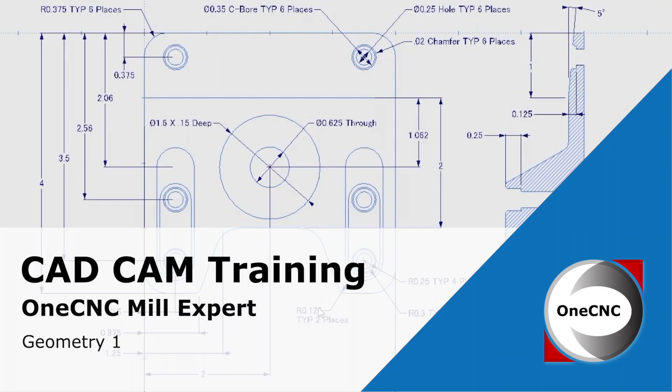Hello, this is Patrick at OneCNC West, and what we're going to do in this training video is create this part using OneCNC Mill Expert.

Now, to create this part, we're going to be using something called hybrid modeling. Hybrid modeling simply means that we're going to be using surfaces in conjunction with a solid model to create the final component.

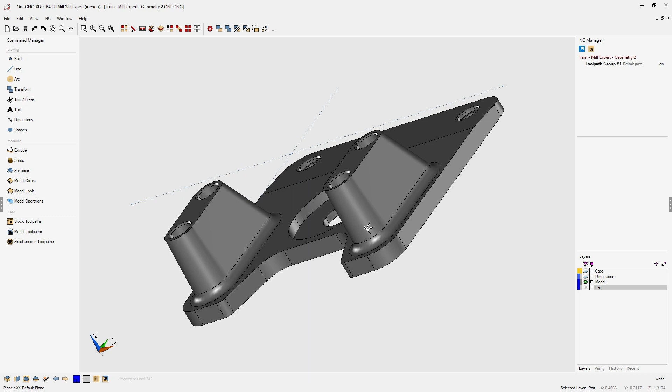Now, you'll notice that if we take a look inside the layer browser, I have a layer called Dimensions. Let's turn that on. The dimension layer is going to provide us with all the coordinates and dimensions for our geometry, and this is going to make for a great reference to make sure that our geometry is right on track.

Now, taking a look at the part, we can see that the part is symmetrical. So all we really need to do is just draw half of it, and then we can mirror that to save time. I think we should start by creating this outside boundary, so let's begin by doing that.

I'm going to turn our dimensions layer off and head over to the command manager and select our line tool. Now I want to use coordinate input for this. Our line's going to start at x0, y0, z0. So I'm going to click OK.

Now I want the endpoint of the line to come down to y minus 4. That looks good, so I'm going to hit the enter key. That takes me to the z coordinate. I don't need to do anything there. I'll hit enter one more time, and that recycles the prompt and creates the line.

Now it's waiting for the location for the next endpoint. This is going to be at x.875. Again, I'll hit the enter key, enter again, and then enter one more time to cycle through the axes. That looks great. So now it's looking for a new x coordinate.

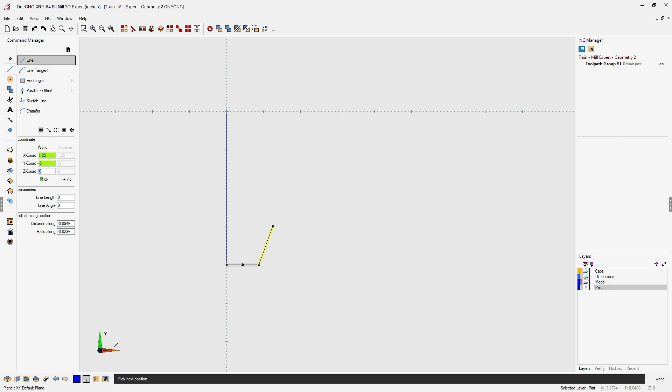This is going to be x1.25. I'll hit the enter key, and for the y value, this is going to be minus 3. So I'll hit enter, enter again, and now that we're finished, we can hit the escape key on the keyboard. Now let's quickly turn our dimension layer on and off and make sure that we're right on track. That looks excellent.

Now let's create the circles that represent the holes that we're going to be drilling. These holes have a diameter of 1/4 inch. We can see that up here. So our first hole is going to be at x.5 and the y value is going to be y minus 0.375. So let's create that.

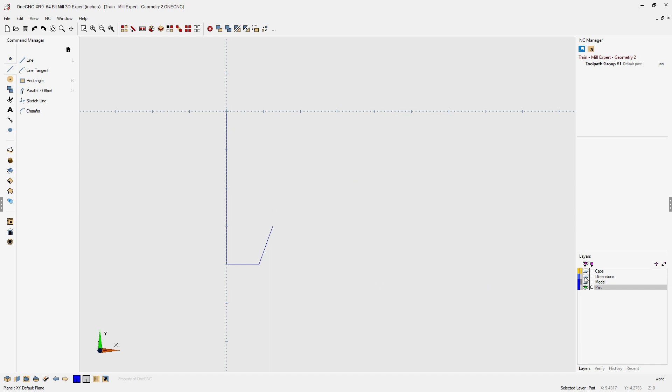Again, I'll turn our dimension layer off. Let's head over here to the command manager, and now we're going to use our circle tools. This is going to have a diameter of 250 thousandths, so 0.25, and the coordinate for this is going to be x.5. Going to hit the enter key, minus 0.375. Again, I'll hit enter, and there's our very first hole created.

Now for the second hole, it's going to use the exact same x coordinate. So I'll just hit the enter key, and the y value for this is going to be y minus 2.56. That looks good. Hit enter, enter.

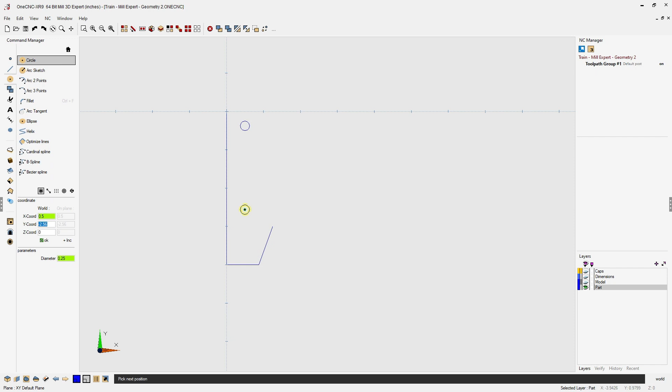The next and third hole is going to be again at x.5. I'll hit the enter key, and now the y value is going to be y minus 3.5. Very good. Hit the enter key, enter one more time to cycle through, and then I can hit the escape key on the keyboard.

Now these holes require a counterbore, and the counterbore has a diameter of 350 thousandths. These are going to be easy to create. We'll go back into circle. We'll change the diameter to 0.35.

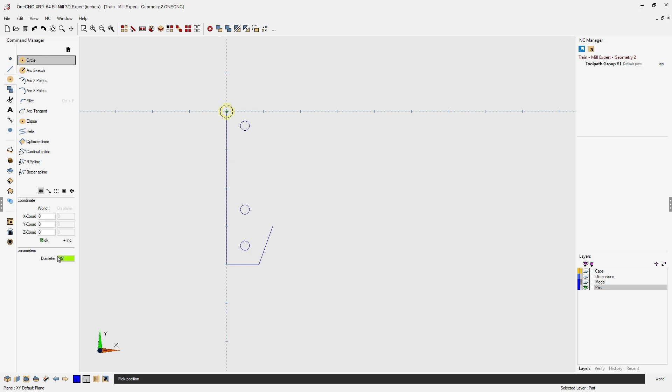And now instead of using coordinate input, I'm just going to take my cursor and snap the arc center of the arcs or circles that we've already created. Now you'll know you're at the arc center when you see the little diamond. Just left click, and left click. And when you're done, you can right hand mouse click. All right, let's turn our dimension layer on and off and make sure that we're right on track.

Very good. Now, what we're going to do next is we're going to create this oval. This oval shape is the base of this boss. Now, to create the boss, we're going to create these two circles first.

If we look at the dimensions, we can see that the circles have a radius of 300 thousandths. So let's create this circle first. To do that, we know that the x value is going to be 0.5, and the y value is going to be y minus 2 inches, 60 thousandths.

So let's create that. Let's turn our dimension layer off. Let's head over here to our circle command, and for the diameter, that's going to be 600 thousandths. All right, now the x value is going to be 0.5. Hit the enter key. The y value is going to be minus 2 inches, 60 thousandths. So we're going to hit enter, enter one more time to cycle through, and then we can hit the escape key on the keyboard.

If we reference our dimensions layer, we can see that we're right on track. Let's create the remaining circle down here. It's going to have the same x value, but its location is y minus 3.5.

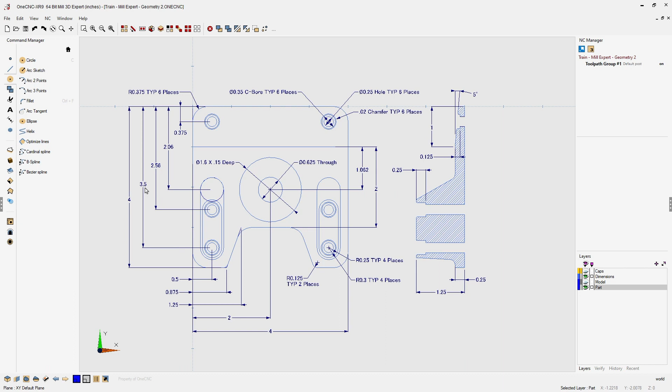In fact, we can actually snap this arc center to create this circle. Let's head back over into the command manager, select circle, diameter is already set at 600 thousandths. We can take our cursor and snap the center by left clicking, and when we're done, we right hand mouse click. I'm going to zoom in just a little bit.

Now let's take a look at creating this oval, this smaller oval. That represents the very top of the boss. Those circles have a radius of 250 thousandths. These circles are going to be easy to create. Let's do that. Let's turn our dimension layer off. Let's head over to the command manager. We're going to select circle, and this time the diameter is going to be 1/2 of an inch, 0.5.

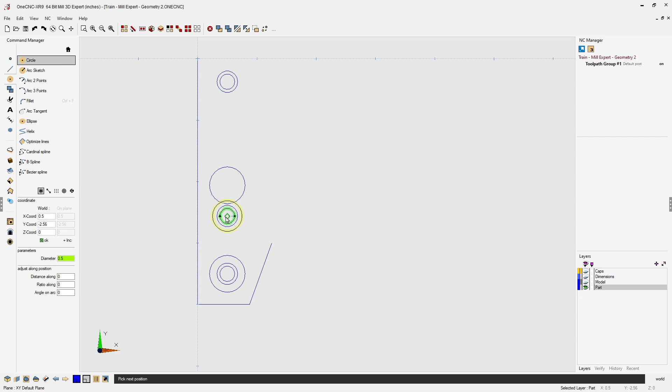All we have to do is take our cursor, and just like before, left click the very center of the existing arcs, just like that. All right, that's looking great. Let's zoom in a little bit.

Now let's create the lines to complete the ovals we're creating. We'll head back into the command manager, select the line tool, and for this we're going to use line tangent. I'm going to take my cursor, left click the big circle here, take my cursor down, and right when I get to that quadrant on that circle, I'll left click. Now I can come back over here, left click, and left click.

Let's do the same with the smaller oval. Same thing, we're going to left click and left click, left click and left click. And when we're done, we can right hand mouse click.

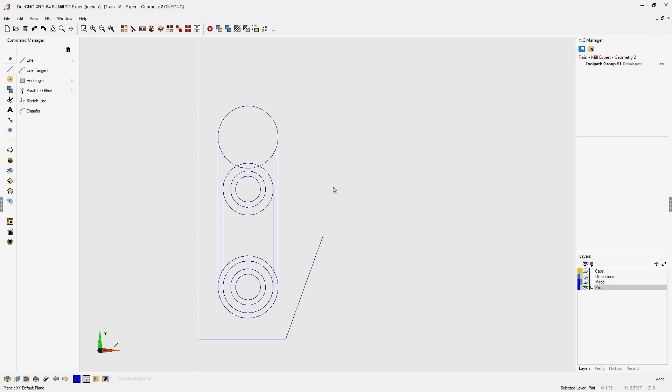Now probably the fastest way to trim this up is to use the scissor command. I'm going to hit the letter X on the keyboard, and all we have to do is just left click the geometry that we don't need. Again, all I'm doing is left clicking and left clicking, just like that. We'll continue the process to finish our ovals, and there we go.

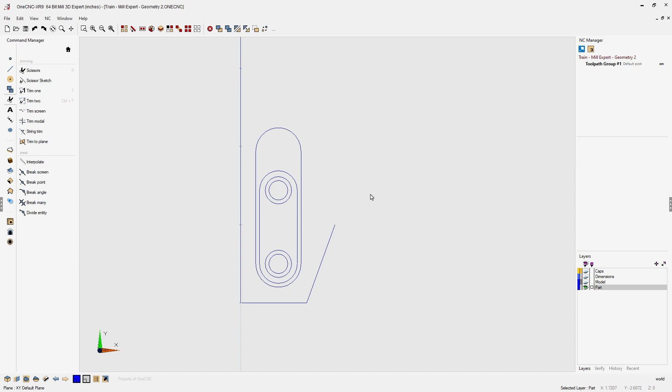We've got our main oval, the larger oval, to represent the base of the boss, and then we have the smaller oval to represent the top of the boss. Let's double check and make sure we're right on track. Let's head back over to the layer browser. We're going to turn our dimension layer on and back off again. We can see we're right on track.

All right, now it's time to mirror the geometry. When you mirror, rotate, or move geometry, you need to select it first. You can use any of your selection tools at the top of the screen, or a shortcut is hit Control-A on your keyboard. That will select everything.

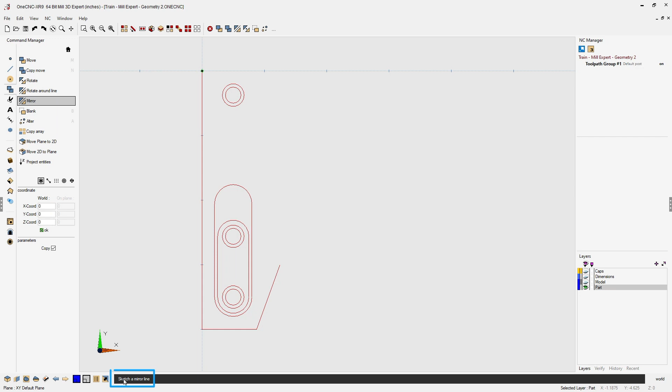I'm going to use the mirror command, and the first thing the mirror command wants us to do, we can check down here in the lower left corner, it says sketch a mirror line. Well, we know the part is 4 inches wide, so I can come up here to the grid and snap right at X 2 inches, pull my cursor down, and left click, and when we're done, we right hand mouse click. Very good. Now let's connect the outer profile.

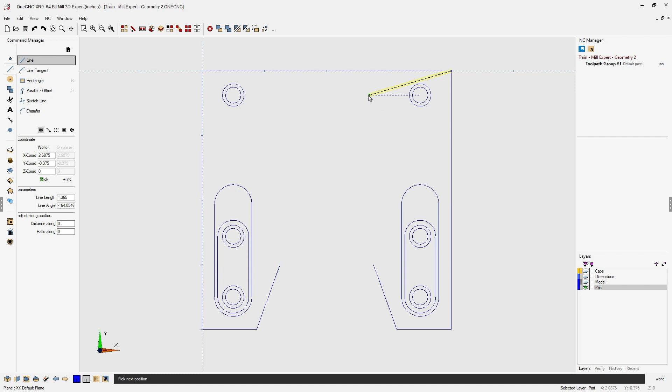Let's go back into the command manager, select our line tool. We're going to left click. When we're done with that line, we can right click, left click, and when we're done, we right hand mouse click. Let's take a look at creating these fillets.

If we turn our dimensions layer back on, we can see these fillets have a radius of 375 thousandths. So let's turn our dimension layer off, head back into the command manager. We're going to go into our circle tools, and there we'll find our fillet command. The fillet radius is 375 thousandths, so I'm going to type in 0.375, and all we have to do now is take our cursor and left click the 2 lines where we want to create the fillet.

It doesn't matter which direction we go. I'm going to left click and then hover over the next line, and notice how we get that preview. If I like that, I can left click again. So here's the process: left click, left click, repeated for each corner, and one more time, left click and left click. When we're done, we right hand mouse click.

Hey, I think our geometry is looking great. Let's quickly refresh our dimension layer and see if we're right on track. All right, this is looking good.

Now, if we take a look at the bottom of the part, we can see that there are 2 fillets, and these fillets have a radius of 125 thousandths. If I toggle the dimension layer on and off, you can see there's a fillet here and another one right here. Let's create both of those.

So I'm going to turn our dimension layer off. I'm going to head back over to the command manager, back into our fillet tool, and this time we're going to change the fillet radius to 125 thousandths. That looks good. So we're going to left click, left click, left click, and left click. And when we're done, we right hand mouse click.

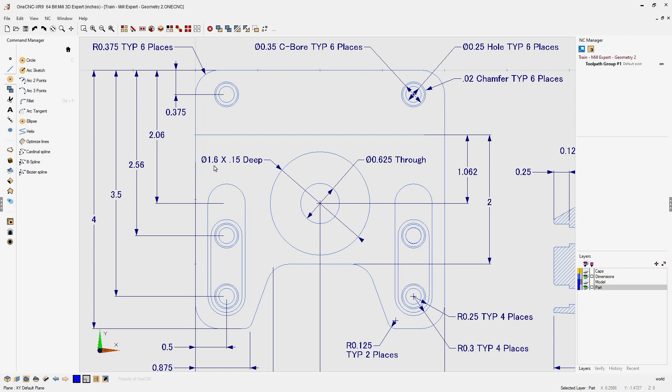This first circle has a diameter of 1 inch 600 thousandths. It's going to be created at x 2 inches, and the y value is going to be 1 inch 62 thousandths plus another inch, so that's y minus 2 inches 62 thousandths. Let's create that, and turn our dimension layer off.

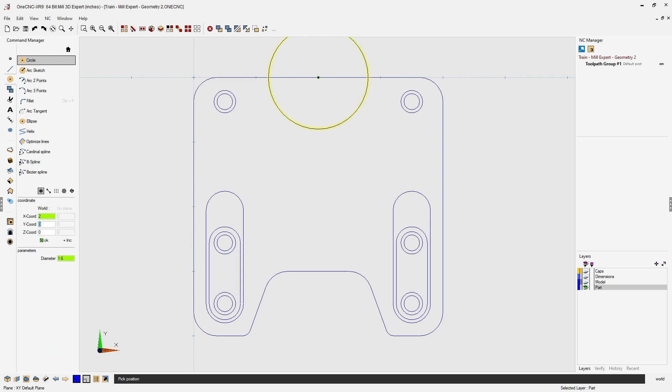Let's head over to the command manager and select our circle tool. The diameter is going to be 1 inch 600 thousandths. The x value is going to be 2 inches, I'll hit enter. The y value is going to be minus 2 inches 62 thousandths. I'll hit enter, enter one more time, and then hit escape to finish the command.

Now there's another circle inside here as well. Let's turn our dimension layer on and see what that is. That has a diameter of 625 thousandths. That's going to be super easy to create.

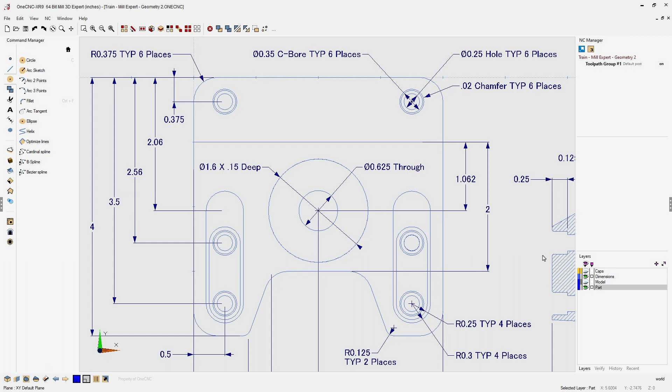We'll head back over to the command manager and select circle. The diameter is going to be 625 thousandths. Instead of using coordinate input, we can take our cursor and just snap the center of the larger arc. When we're done, we can right-hand mouse click.

Now there's one more line I'd like to create, and I'll tell you why. Let's turn our dimension layer back on. Notice how this part has a taper, a 5-degree taper. I want to create this line right here to represent where that taper begins. That's going to help us later on when we start creating our solid model. This line is parallel to this line, and the parallel distance is simply 1 inch, as we can see right here.

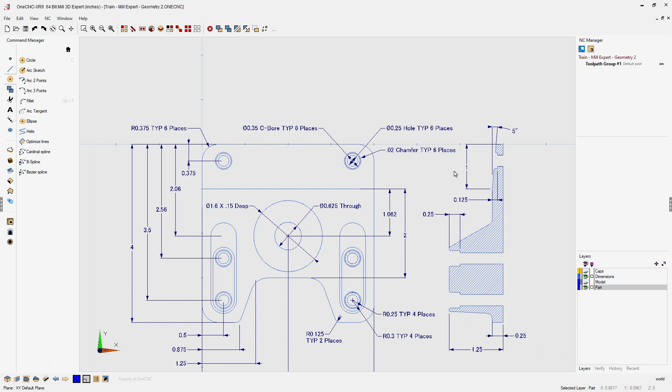Let's create that. We can easily do this by heading back into the command manager, selecting our line tool, and for the parallel distance we're going to select parallel offset, with an offset amount of 1 inch. Now we just take our cursor, left click the line we want to be parallel to, then move our cursor to the side where we want to create the line. I want the line right there, so I'll left click, and when done, right-hand mouse click.

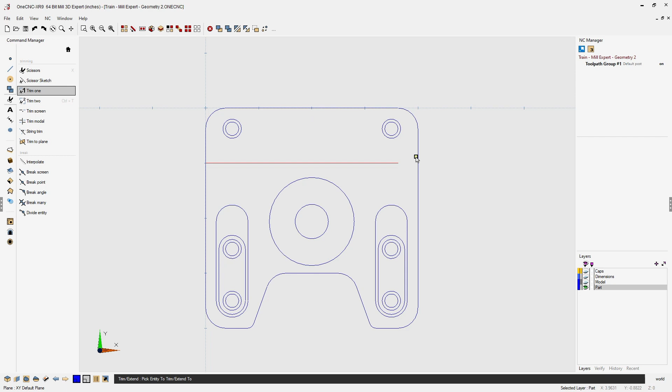Now to tidy this up, let's trim the edges of the line so they extend all the way to these vertical lines. We can do that by hitting the letter T on the keyboard, the shortcut for the trim command. That will trim one entity against another. We're going to trim that end of the line to that line, and this end of the line to that line. When we're done, we can right-hand mouse click.

This is looking good. I think we're almost finished with our wireframe geometry. There's only one thing left to do.

If we hit the spacebar twice to go back into a CAD view, let's turn our part layer off and our dimension layer back on. We can see that the thickness of the part is 1 inch 250 thousandths, and the top of the boss is actually 1 inch away from this face right here. So what I'm going to do is take the geometry we created that represents the top of the boss and simply move that up in Z 1 inch.

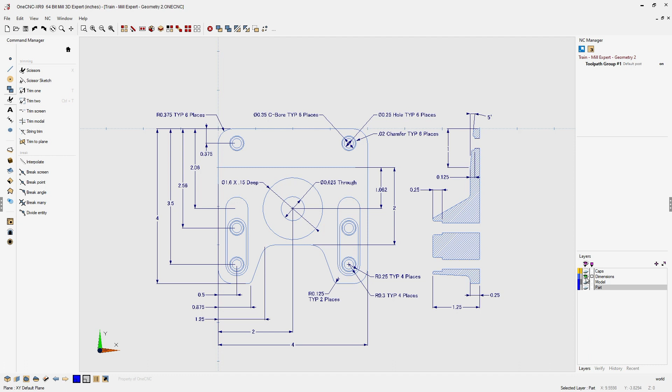Here's how we're going to do that. I'm going to turn our dimension layer off, turn our part layer back on, and select the geometry we want to move. I'll hit the letter S on the keyboard to go into select mode, then left click the geometry I want to move. Just simply left clicking - that looks good.

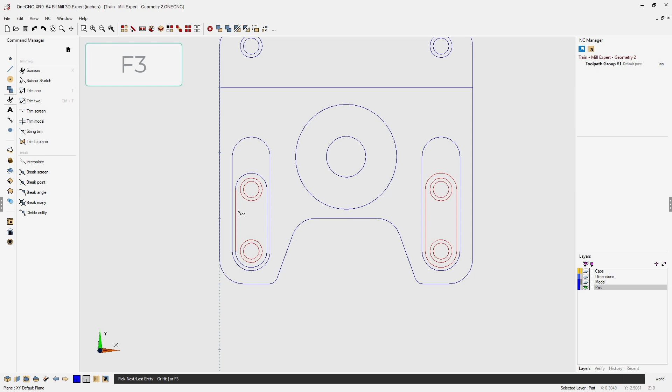We can do the same to the oval shape we created as well, just left click and left click. Now, an alternative to left clicking is you can use chain select if you'd like. If we select chain select, you can left click, select the direction of the chain, and then hit the F3 key on the keyboard. That's another way to select the geometry.

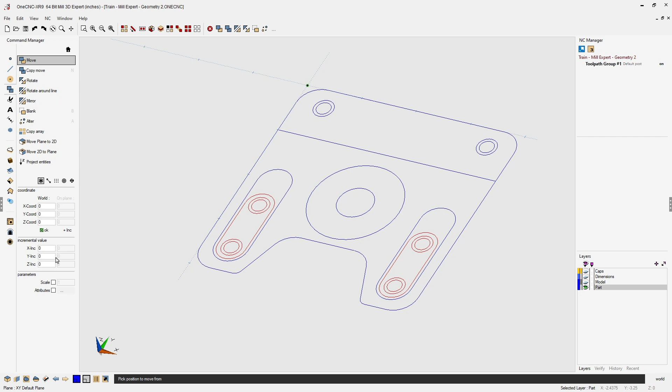Now with that geometry selected, we can move it. Remember, we want to move that up in Z 1 inch. So we're going to go to the top of the screen, select our Move tool, and over here on the left within the Command Manager, we're going to type in an incremental Z value of 1 inch. If you don't see the incremental input area, just click on the little plus sign and that will expand it down. So for this, we type in 1 inch. That's going to take that selected geometry, move it up in Z 1 inch, and then we'll click OK.

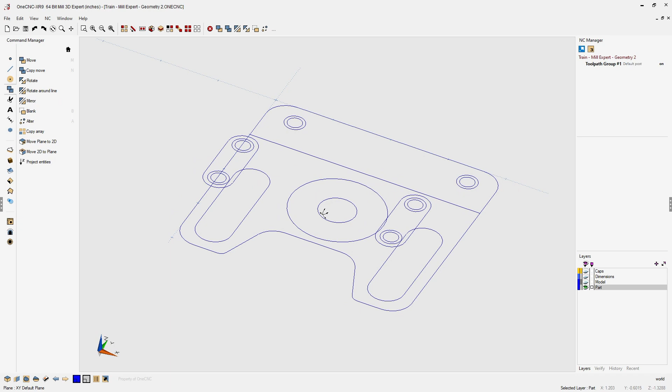Very good, we can deselect our geometry by clicking this button, and that's it - we've created our wireframe geometry. In the next video, we're going to finish the part by creating the surfaces and the solid model. We're going to join all of that together into one shape, and then we'll also take a look at creating some cap geometry.